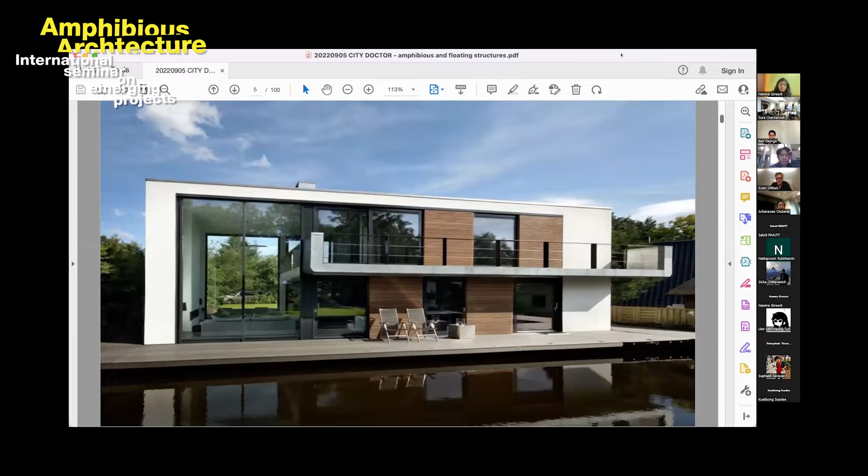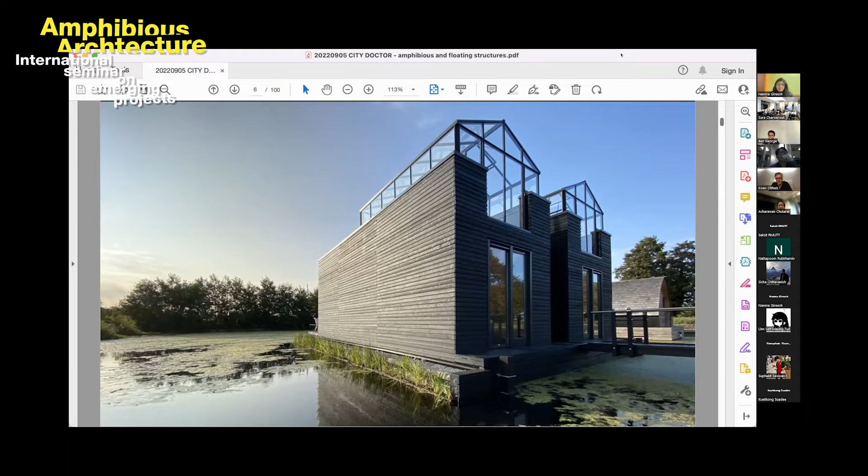Amphibious structures like these ones that seem to be a normal house, but if you walk around, you see they're also floating houses, which will emerge from the water once there is a lot of flooding. Houses that are being built prefab, in small CLT, cross-laminated elements, brought to the site, still look like normal houses, but they move up and down with the water.

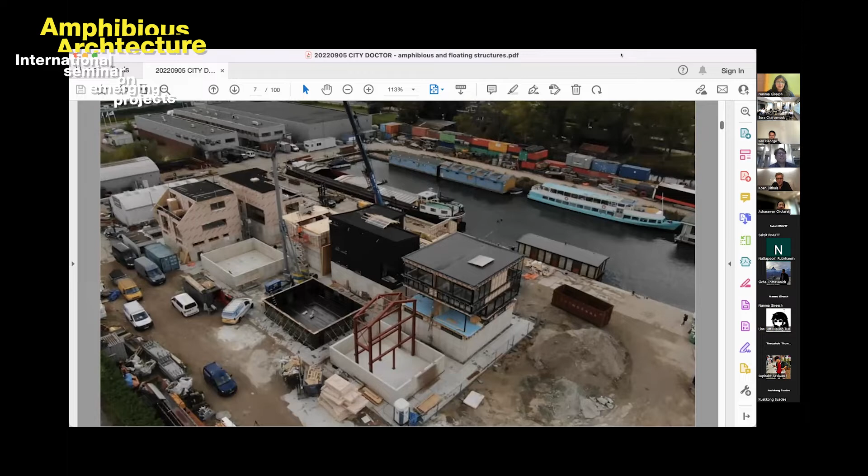If you want to scale up, it's not about one house or two houses, it's really about understanding the logistics of this kind of construction. For a project in Amsterdam, which is called Schoonschip, we had to rethink the construction process. Almost 50 kilometers outside the city, there was built a kind of temporary dry dock, a temporary site where all the concrete foundations were placed. All the houses were built on top of them and then craned into the water. And here you can see the concrete foundation underneath it, placed in the water and then towed to the location.

And at the location, they were all connected, and it ended up as a kind of neighborhood with all experimental housing, disconnected from the grid. They made their own energy and their own sewage system. They share energy. If one house has more energy than another house, they can take it from each other. So it's the next step.

Housing in the Netherlands starts, of course, in canals and small lakes, but has already evolved into living on rivers. One of the projects is in Dordrecht. We just saw an example of that. In that river, you can see the water can even go, in extreme situations, almost 4 meters up and down. For that, there are big stilts next to it. And even if you go on holiday and come back, you will find your house still safe, only maybe a little bit higher than before.

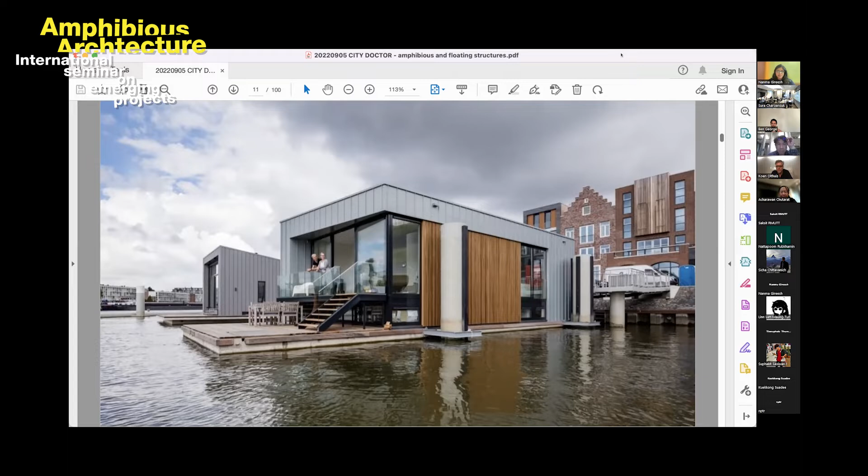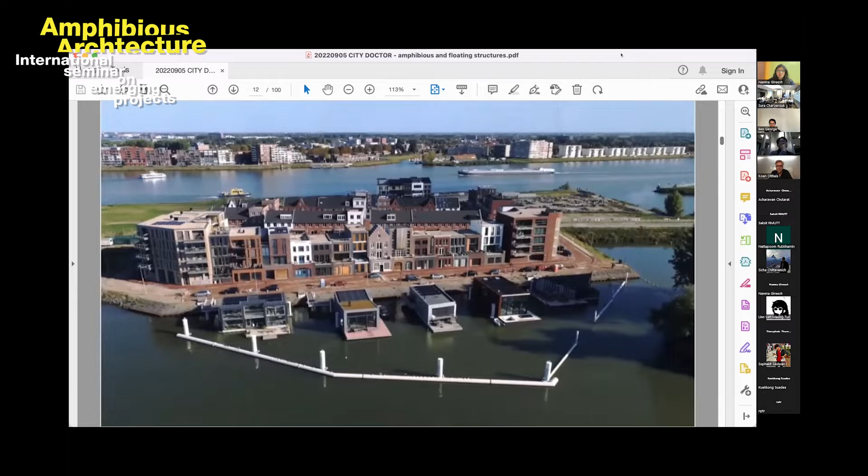Some floating breakwaters around it. It's partly to get the waves a little damped, but in reality, it's more to keep the waste out of your neighborhood, because the houses themselves are stable enough to work with these kinds of wave climates in that river. If you can do these kinds of structures on the river, you can also go to larger platforms built from modules, and then to what we call floating islands.

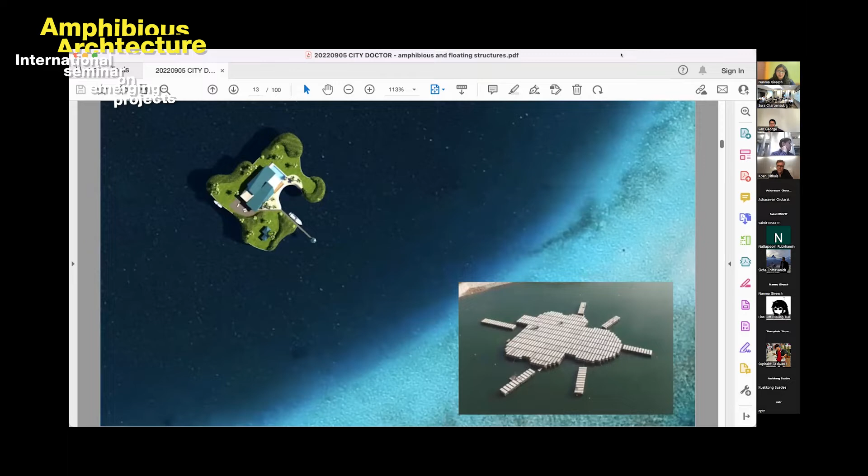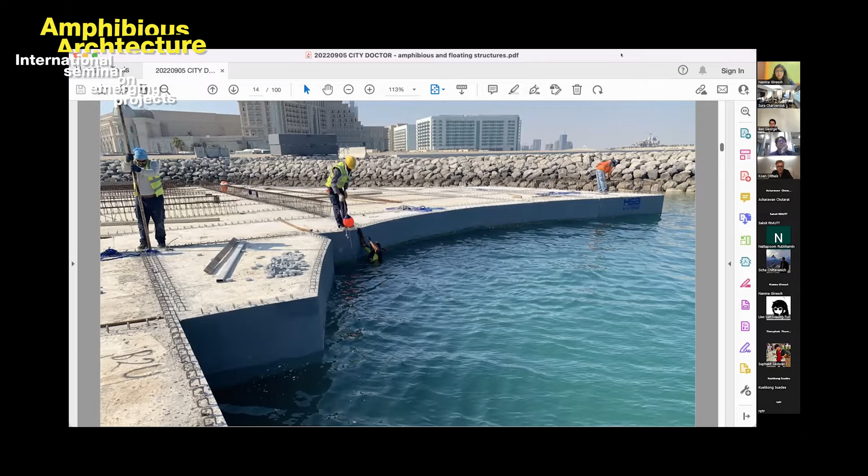We are working now on floating islands in Bahrain. We're doing that with parties in Turkey who build modular structures. Modular structures are connected to each other. So you bring them as Lego parts, you make your complete shape. Then you take another layer of reinforced steel, and then you pour the concrete on top of it, and you can make almost every shape you want. And once you have done that, then you can place the houses and the trees on top of it.

So we're going to build 20 of these islands in Bahrain, and the first test island was just finished. If you can do islands, you can even go one step further, and that's designing building blocks. And a building block is then a platform with several floating houses on top of it, even parking in it.

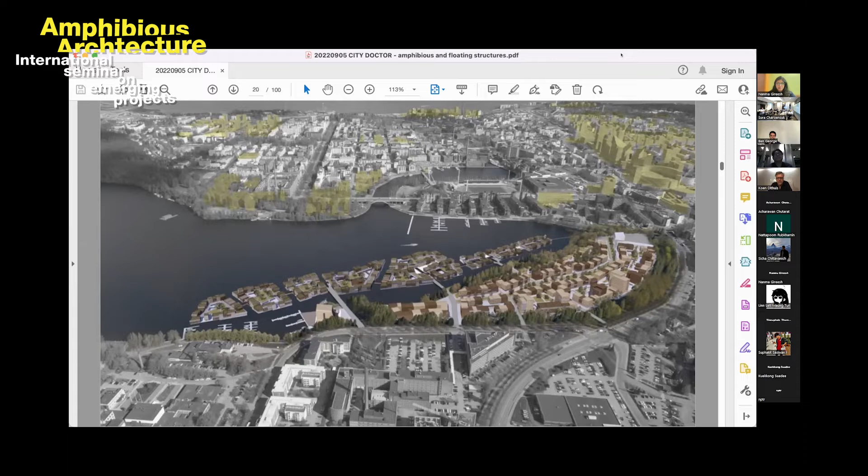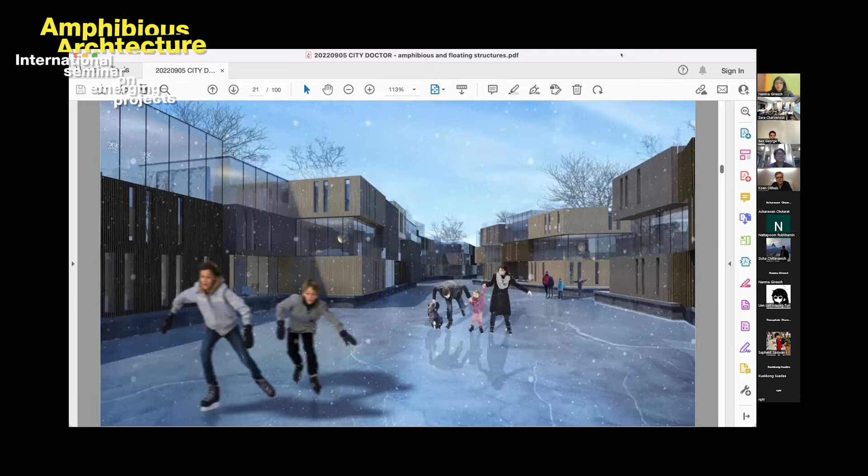And if you place these kind of building blocks next to the shore, you can create complete neighborhoods that are not that different than neighborhoods you can expect in Amsterdam. And so in the wintertime, fantastic, of course, to skate over the water. So all these things are elements, are kind of medicine parts, which we can start to use for cities all over the world to solve their problems.

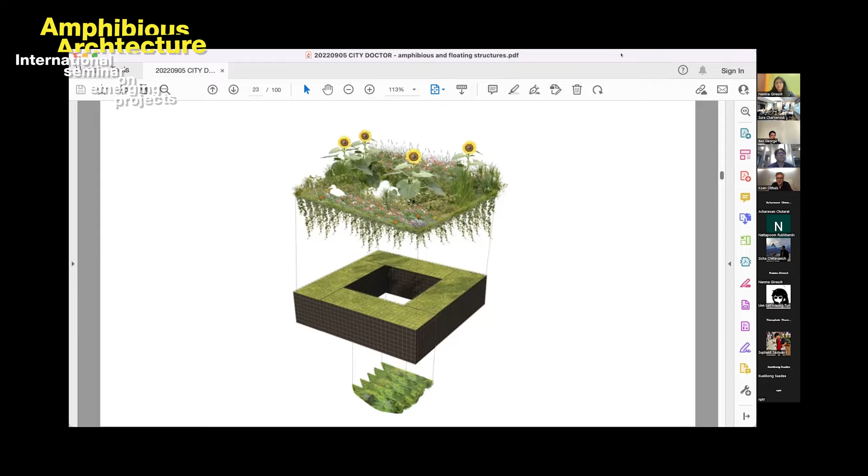The problem is not only housing, but it's also how we can get a better symbiotic relationship with nature. If we do designing on water, mostly they ask us to also take care of the green. For this, we have designed some floating parks that have green above the water and even green underneath the water.

This is a small floating park in the south of the Netherlands, which is existing of all these modules, which are there now for almost a year and a half. And already we see a lot of changes underneath the water for the habitats of the fish. Very, very nice. And with the same structure, we also can grow now to the larger parks.

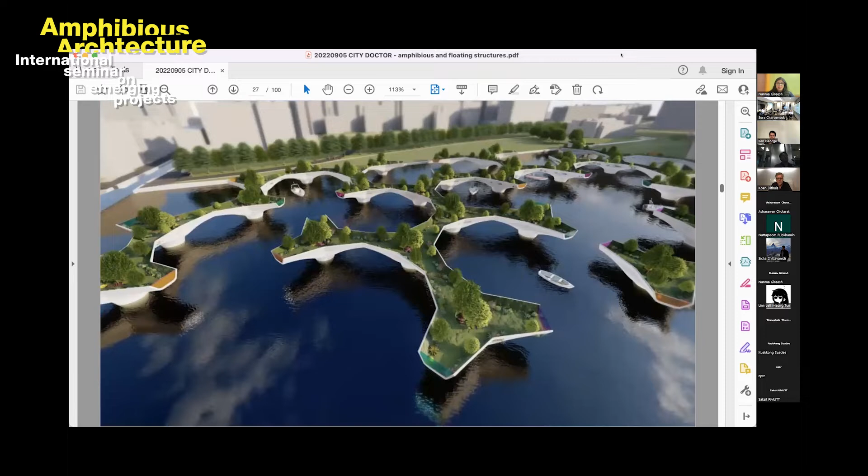We got a first assignment from the aldermen from Amsterdam, where they want to have a kind of modular floating park. And the idea was not to take only water away, but also keep the water, make it possible for people still to go there with boats and add a layer of green on top of it. So it will end up in a kind of park with almost 50 bridges, and you can go with the boat underneath it and still have the green on top of it.

The beauty about floating parks is that they don't have to be static. So we think that one of the medicines and one of the solutions for cities that are changing and you want to adapt is that you also can adapt to seasons. So this is a seasonal park. It's for Toronto, where the park in the summer creates a fantastic open space in the middle where you can go with your boat and you can enjoy the water.

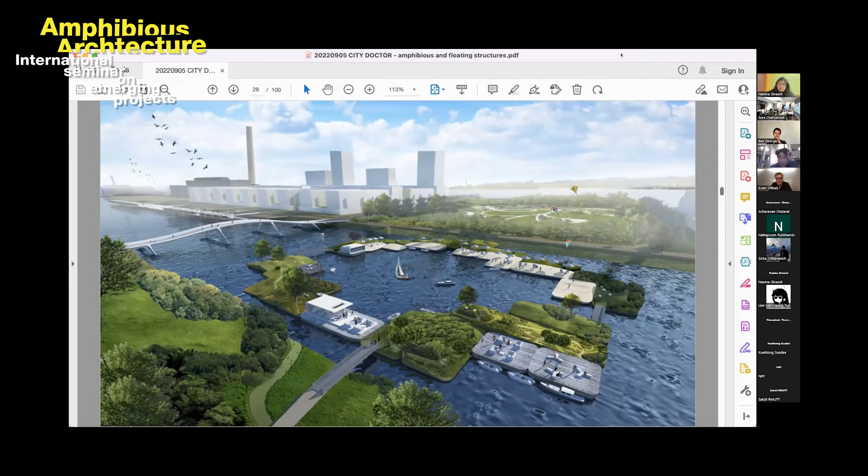But in the wintertime, the whole floating park is reconfigured, and it starts to be a system where we have on two sides a protected water, and where the green takes the wind of that region away. From that project, we even went one step further.

We got a request for a project in Qatar, where the Emir of Qatar was thinking of how he could cool down the temperature in Doha. And for that, he wants to build a floating forest in front of the coast of 10 kilometers by 2 kilometers, really, really large. And by taking more shade on the water, they think they can reduce the temperature of the water with 1 or 2 degrees. And then with some cool wind over it, it must have a little bit of effect in Doha itself.

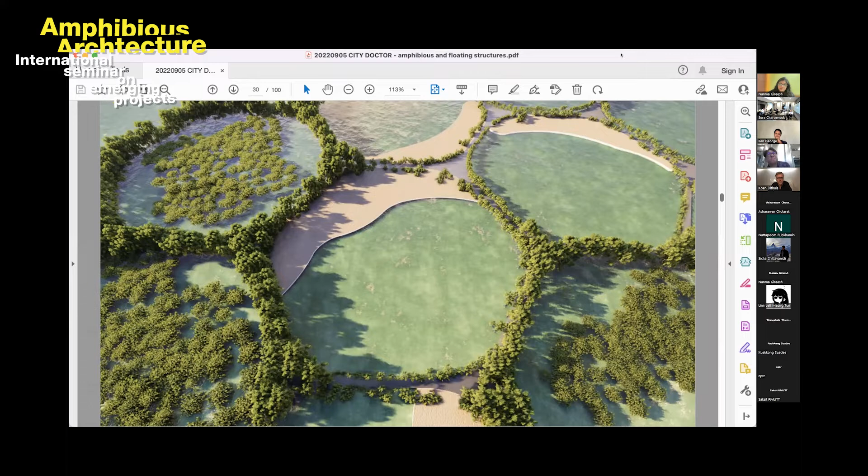Of course, you can't build a complete park from 2 by 10 kilometers. So it should be a kind of grid system where the technology came from the fishing industry, where you have these large fishing farms, these round fishing farms of tubes, and in between we get then the floating mangroves.

That brings us to the next medicine, and that is the adaptability and the possibility to react to changes and to requests in your cities. We call them city apps, which are kind of instant solutions to upgrade the performance of your city. And to do that, you need structures that can be moved from one location to another location. It doesn't have to be fast. And can bring a function and connect that function to your city.

This is a project we've done in Miami, which is a large-scale floating villa, and the villa is both a floating villa, a stilt villa, and a boat, so it can get all these different kinds of legal statuses depending on what you want. Now here it is a floating platform, but if you start to move it, it starts to be a boat because there's an engine in it.

We have the electricity, we make it with the solar roof, and then if there is a big storm situation, we can push up the building out of the water. And by that, the waves don't hit the building anymore, but only the stilts, and you get a lot of stability.

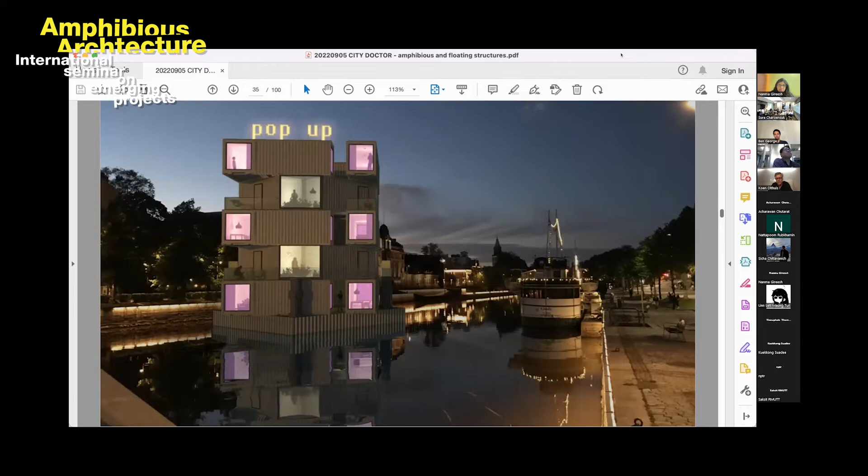Of course, this is fun for one family, but it's not about that one family, it's about the technology that's behind it. But with that technology, it's also possible to go up higher to 3, 4, 5 stories of very simple student housing, also with the same stilt system around it, so we can stabilize it a little bit. And by that, you have an instant solution if there's a request in the city for housing or student housing or for whatever function you need.

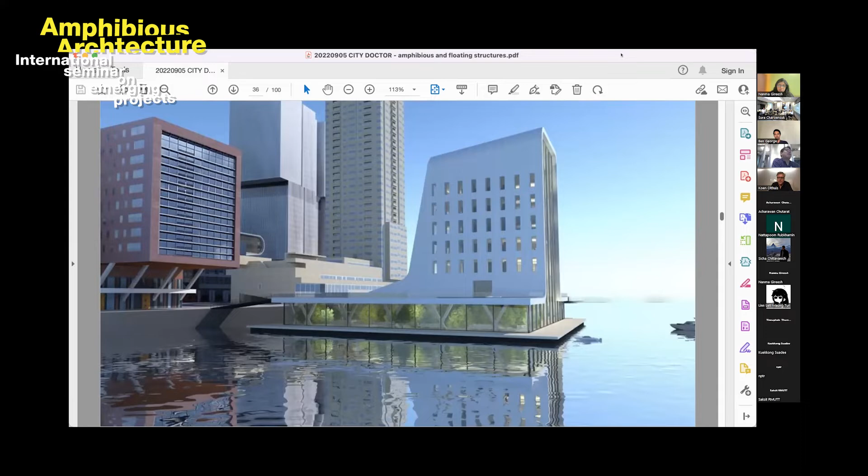So by doing that, you also can grow to these kind of floating offices. So it's the same technology as in that floating house, only now on the large scale. And again, scale is what we need.

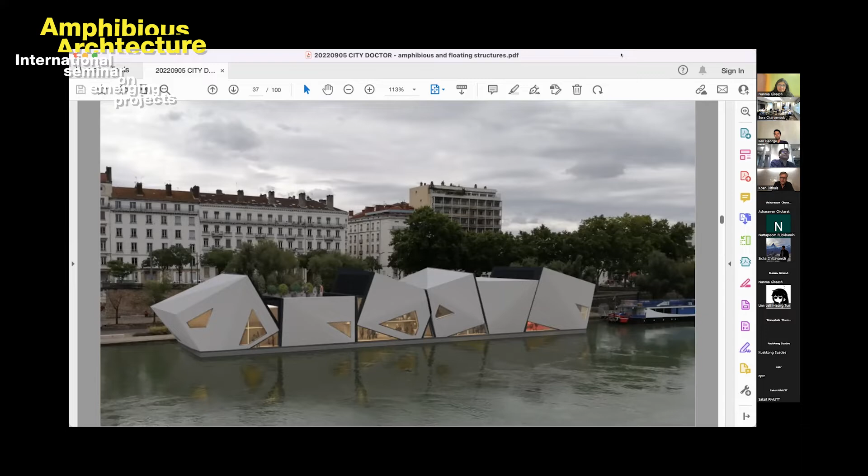Another city app, a function that is brought to a city for a certain amount of time, is the floating theater. We are actually now building in Lyon, in France. And there the city has given the owner of the theater permission to get the theater there for 10 years. But after 10 years, it has to be moved. So they already have now made a deal with several cities in that region, that after 10 years, they get a new location in another city. So it starts to be a function that can be connected from city to city app.

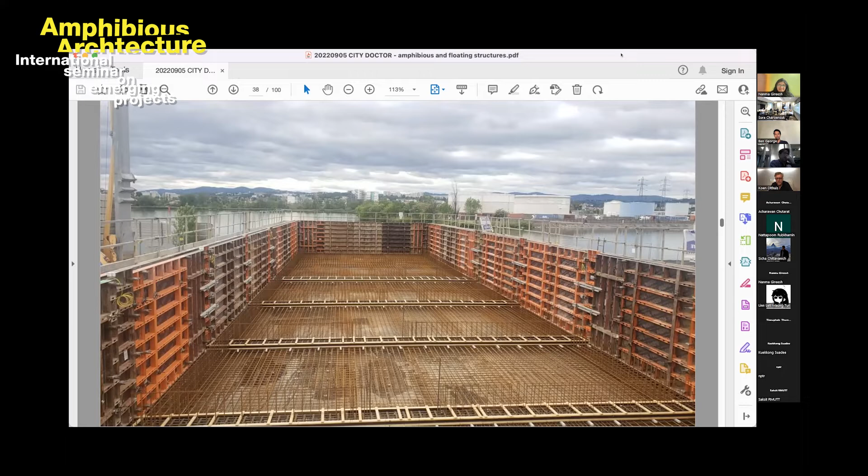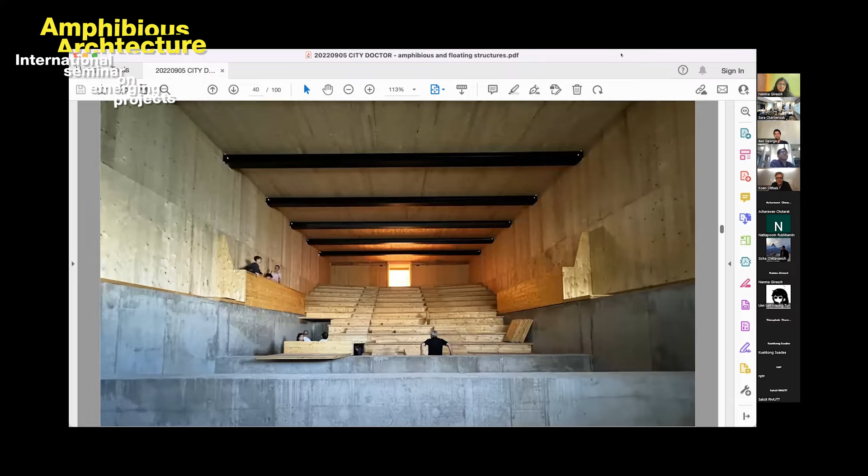Made from a very large concrete foundation. I think the largest built in Europe till now in one piece. And inside we built it with CLT, and here you see part of the big theater stand there. And it will be finished, I think, at the end of October.

So all these kind of elements can bring us slowly to a next step where we can use it to not only do functions, but really build cities or parts of cities, because we think that expansion of cities will be beyond the waterfront.

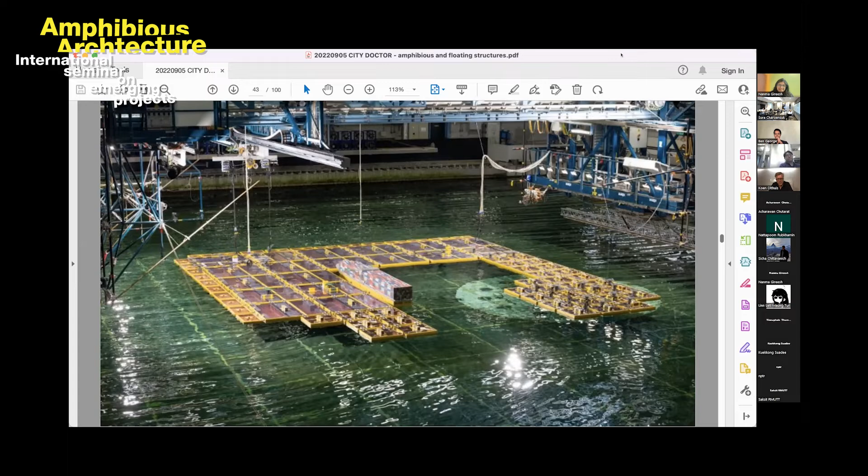In the Netherlands, there's a difference between the architects and the engineers. We have Marin, it's an institute in Wageningen, who does all these kind of studies for large-scale platforms. And there was a study, it's called Space at Sea, for which Dutch engineers and architects worked together to see how you could build on open sea. Because you have probably seen these fantastic, beautiful images of floating resorts in the middle of the ocean. Well, in reality, it's completely different, and sea is very difficult and very harsh, and you have to be very, very careful to start living on the water.

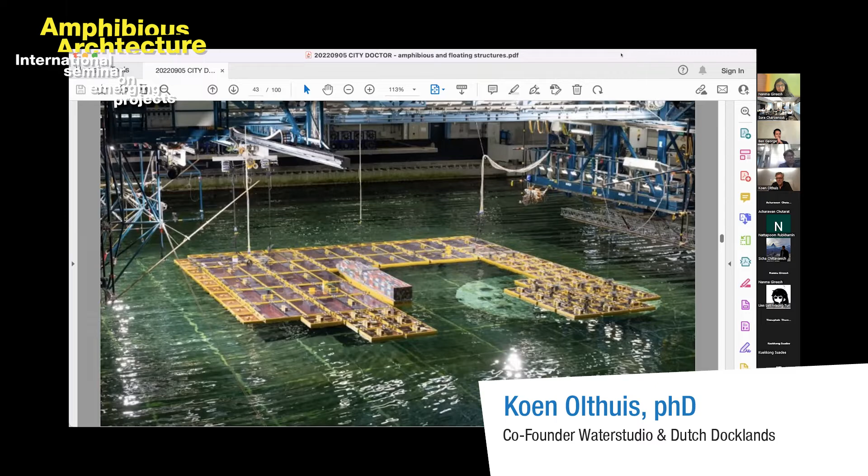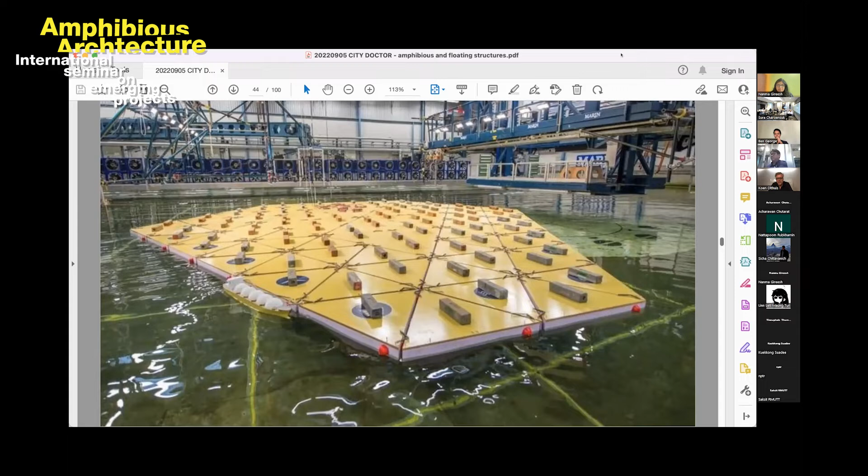So with Marin and with the engineers, there's been a study for large-scale floating platforms that are semi-rigid, so that the platforms can move a little bit, but together they create platforms that are stable enough to house more than 1,000 people. The architecture of these kind of cities on the water will be extreme.

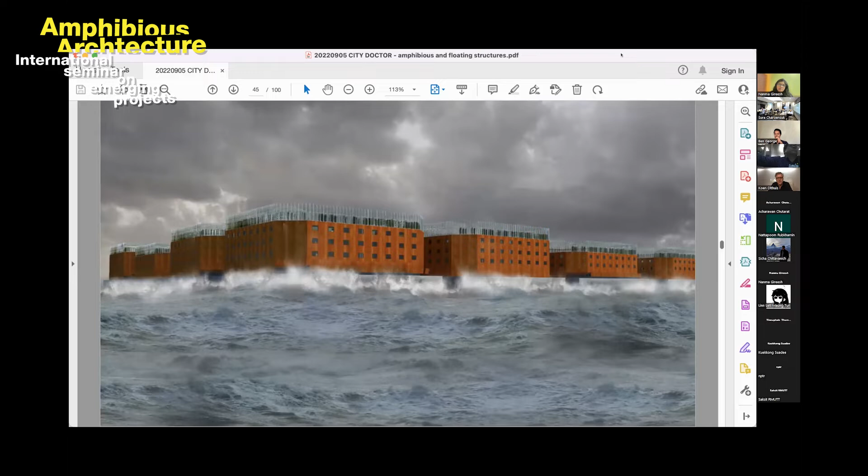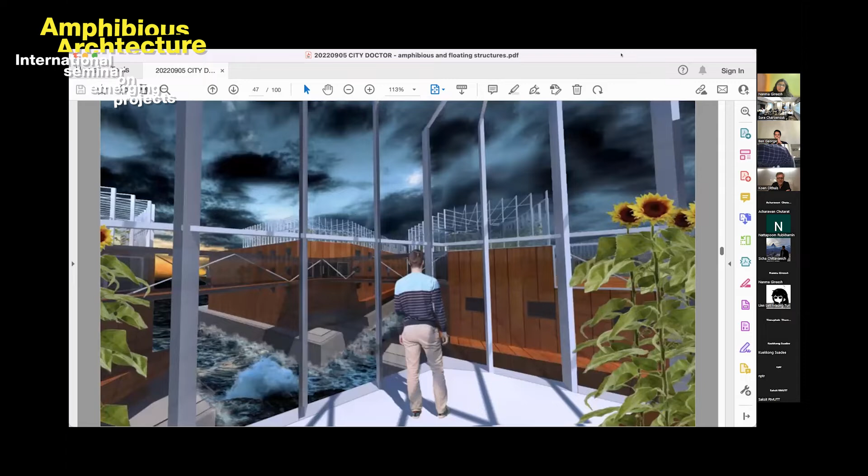So instead of having beautiful houses, we build kind of very large-scale steel fortresses, and then in between the fortresses we have these canals. But if you look then inside the courtyards, it can look quite friendly, because you take the wind and the waves away. But in between is not a place for people to enjoy the canals like in Amsterdam. But it's the reality. It's on open sea. The sea is not your friend, and you have to be very, very careful to take advantage of the sea.

So for us, one of the first projects we have built on water is what we call the SeaPod. Most probably you have heard about it. There was a floating spar that was built just outside of Phuket in international waters. It was a floating spar, so it's like a big stilt, like a dobber if you go fishing. And so it can move up and down. It's completely not connected to the sea bottom.

And there were 2 people who started to live in there, and they said, well, it's international water, so we think we are allowed to live here. The Thai Navy thought a little bit different, so they were forced to go away, and they left the building, and they went to Panama. And they came to us at Waterstudio and asked us if we could redesign the structure, because it looked so unfriendly. So we designed what we call the SeaPod.

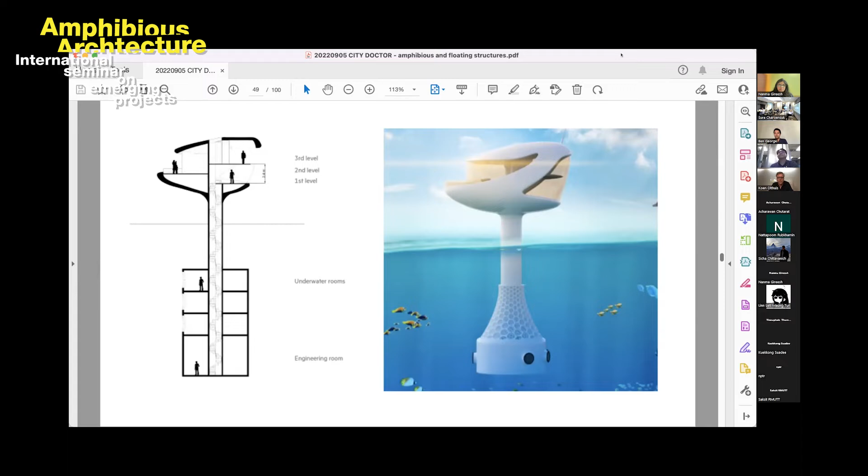And the SeaPod is the second version of the structure that was built in Thailand. And it's a double-story building with only, I think, 80 square meters inside, but we also have space underneath the water with an underwater room. And it's now under construction.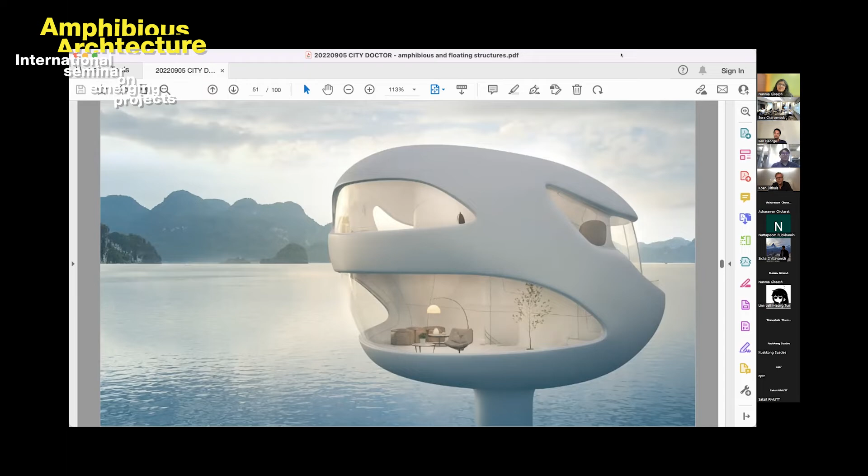It will be opened on the 21st of September, so in 2.5 weeks. And it's in Panama. And what we did, we made the shape now a little bit more friendly, a little bit more futuristic, because again, when you asked your question, why aren't projects being scaled up? It's not only about technology, it's not only about rules and regulations, it's also about getting the people to love these kind of buildings and to understand how they could work in their environment.

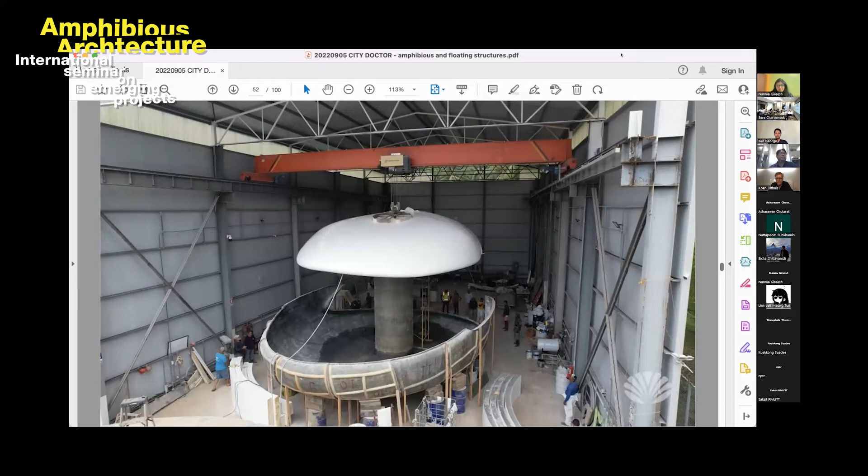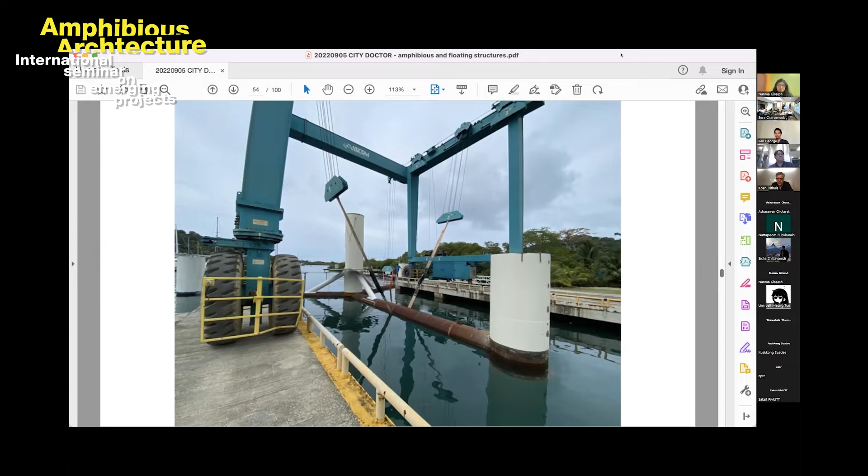Here we can see the structure being built with the molds in Panama. Here's some inside views of that similar building. Here we made a foundation which could be used for more shallow waters. So if you have waters up to 40-50 meters, we can have the complete spar. But if we have waters up to 10-12 meters, we go for this kind of tripod of a floating structure underneath it. And here you can see it in the harbor in Panama, just before the superstructure.

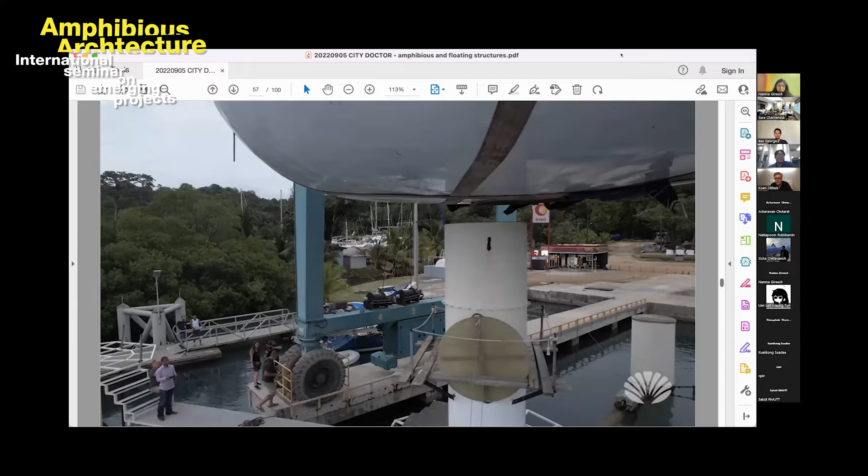So the seapod itself is being placed on top of it. Here we're testing the stability of it. And here you see the first structure being put just on top of that foundation. So in a few months' time, they want to do, I think, 50 of these kind of seapods a year. And so this is the first scale up.

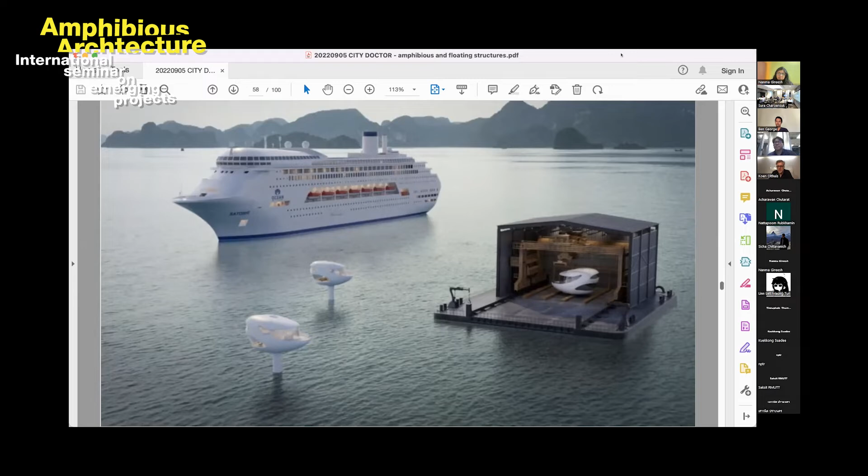And what the guys of Ocean Builders, who is the client, did well, is they already thought about the whole engineering process. So not only about the architecture of the first of it, but how can you build them economically? How can you make sure that it's within the rules and regulations? How can we sell them? How can we maintain them? So all these things are being added.

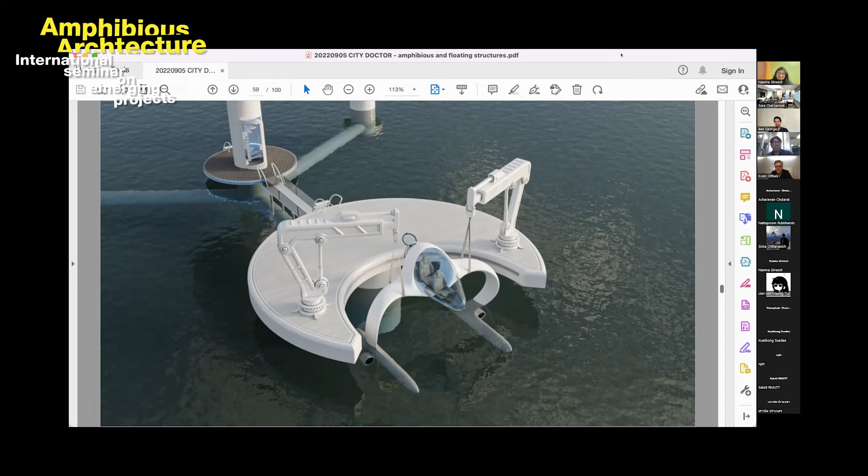And of course, if you build these kind of floating structures on open water, it's not only about the house itself, but also how you can go from one to another. And as these guys are from the Bitcoin industry and they have money enough, they can also test these fantastic other kinds of movements. So for them, in that same system, we've designed what they call Jetsonville. So in Panama, there will be a first neighborhood with around 220 of these kind of seapods with some floating harbors in it. And you see it's all connected and built around existing islands in the south of Panama.

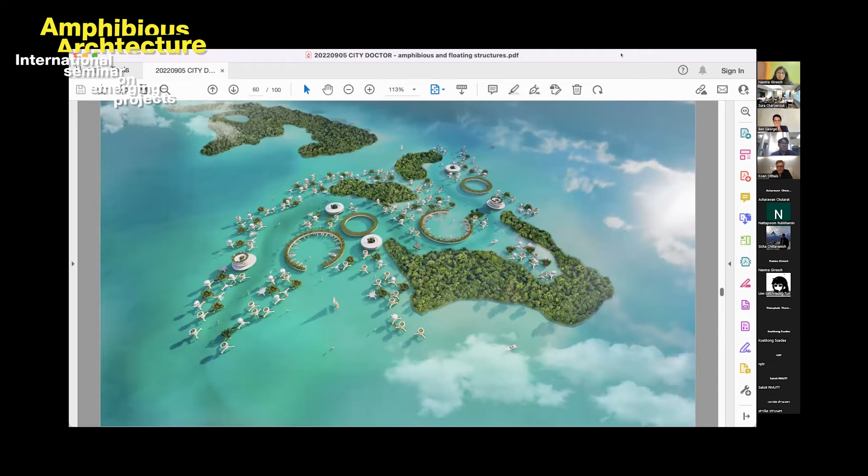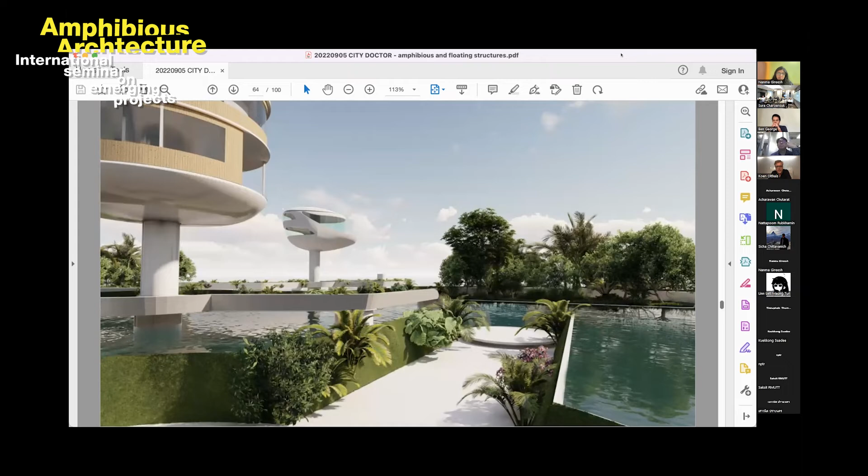And what we try to do there is to rethink how a floating city or floating neighborhood could work. So all these kind of elements can move by themselves, or they can be moved and towed. And it can be a city that looks different in the next few decades. It can grow, it can shrink, and it can reconfigure. Here you can see some of the elements connected to each other. Also, there's of course a lot of floating green, which is important. And this will be the first part of the neighborhood, which they want to have ready in, I think, July next year. So then you have the first 6 to 8 seapods ready.

With these kind of structures, we go to the next project. And of course, one of our most important projects is in the Maldives. The Maldives is for us a fantastic place where for the first time after almost 15 years that we work on these kind of floating structures, we really could do a large-scale project. Maldives is a country that consists of 1,100 small islands spread out over 700 kilometers underneath Sri Lanka. And almost half of the people are living in the main capital, which is Malé, one of the most densely populated places in the world, which is 2 by 1 kilometers. And as you can see, it's built in a lagoon, so that's in a quite shallow area. And outside there's very deep water, so there's also no possibility for the island to grow.

Overcrowding is a problem where maybe 50 years ago people were still walking there on bare feet on beautiful sandy roads and only bikes were there. Today life is really difficult over there. You're living with 2-3 generations in very small apartment buildings. So there are a lot of social problems they are facing. And what the government has seen is that the only way to solve this is to add housing to the community. But where do you find space? Well, they have an island close to Malé. It's called Hulhumalé. There's also the airport island, where they started to make some reclamation. This was just the first days after the 2004 tsunami, where you already see that a lot of sand, because of the waves, has been all washed away into the ocean.

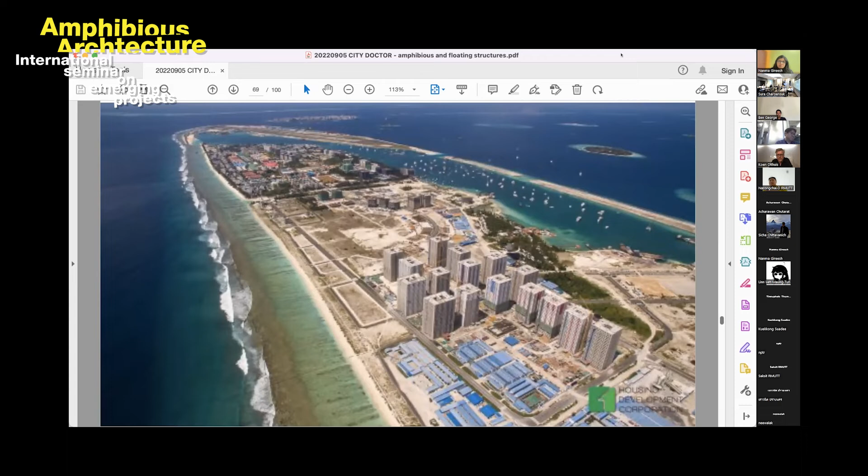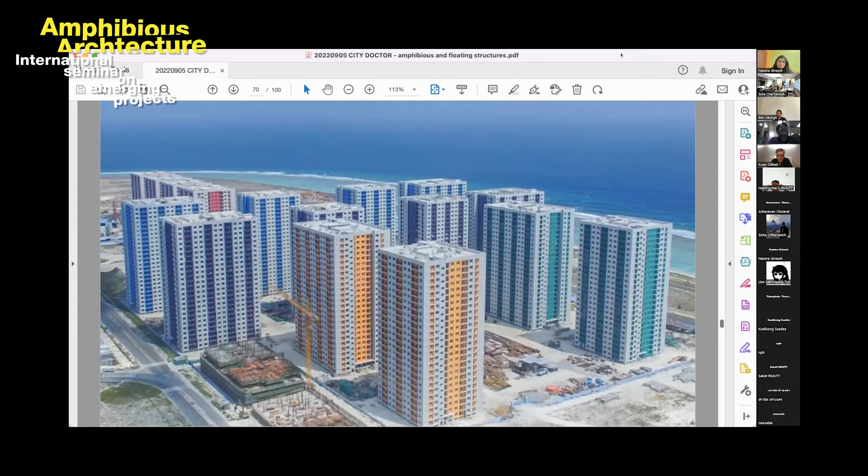That same island you just saw, they needed housing, so you need space, you need density. So what they did, they built these kind of towers, and each of the towers exists of, I think, 400 apartments. Each apartment is around 50 square meters, and it will cost you $130,000. And it was sold out within, I think, 2 months. And then they start to build, and the Chinese have built it for the Maldivians at the location. But what you get is, it is not their kind of culture, not the way how they used to live on the islands.

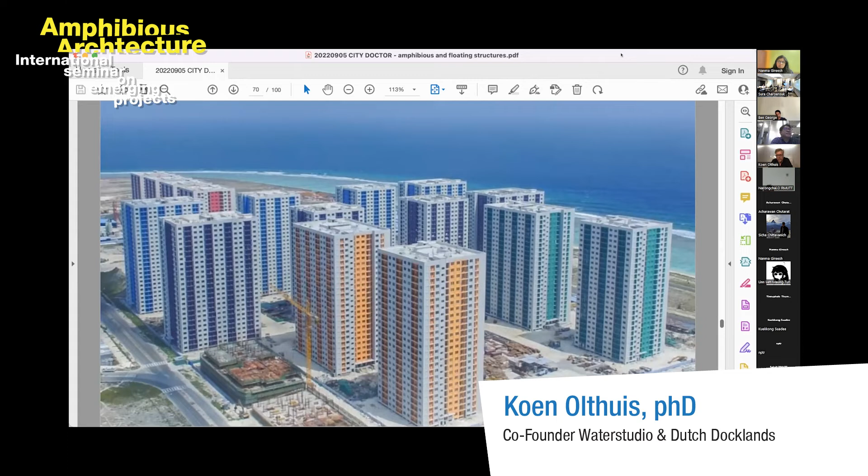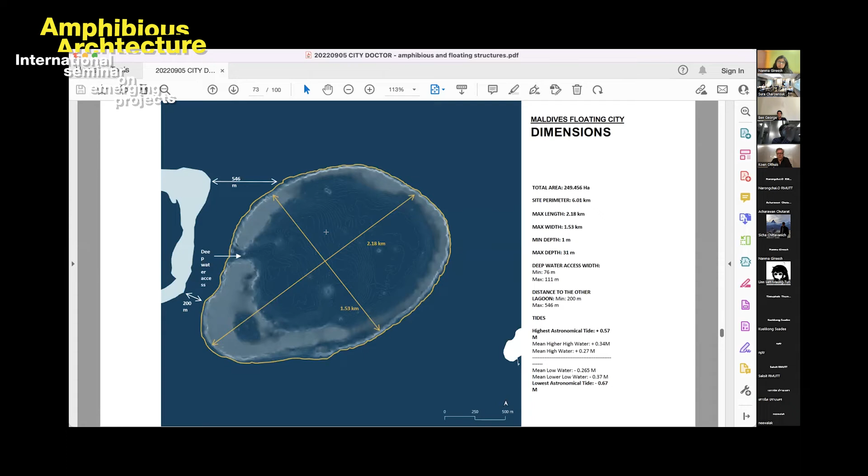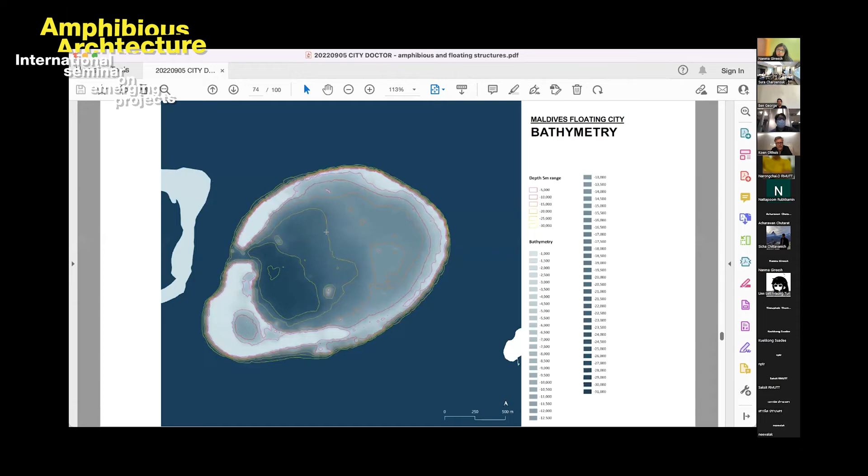The floating city location is, again, same size as Male, 2 by 1 kilometers. So it's quite large, and it has some natural reefs around it, so it's protected a bit from the waves. There's less wave activity than in the water around it. The bathymetry shows that the edges are up to 3-4 meters, so we can add a little bit of sand there, creating even more protection. And then for the inside, we had to find a way how we could place there more than 5,000 houses with the right balance between open water and these built structures.

And we came up with an idea that comes from nature. This is brain coral, and what I like about brain coral, if you see well, is that the brain coral finds a fantastic balance between open space and the coral itself, to allow the fresh water to penetrate and grow through the coral. So we took that as an inspiration.

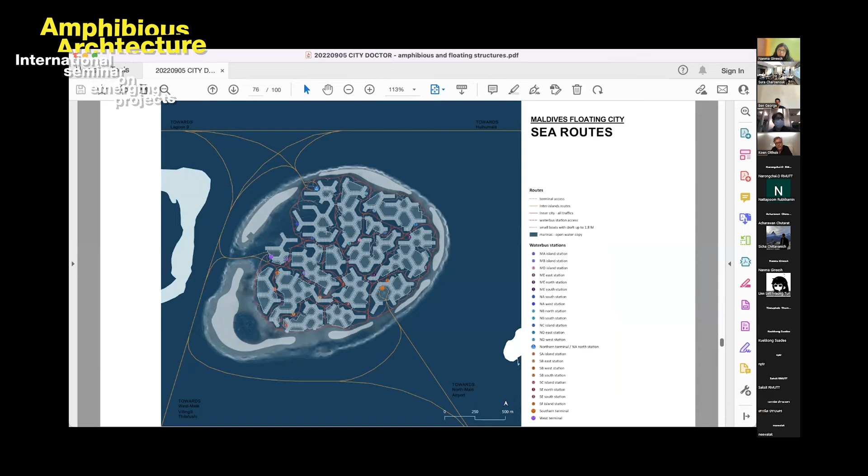And second, we also wanted to have a kind of hint towards the architecture of the locals, also from 50 to 100 years ago. For me as an architect, it's quite difficult because now we are contemporary architects. You always want to make crazy buildings, but here it was not about the architecture. It was really about how can you do a building that is financially feasible, technically feasible? How can we build it within 5 years? And 5,000 houses in 5 years is quite difficult. It's a lot. So all these elements came together in one project, and we try to bring this kind of architecture there that is very, very specific for the Maldivians.

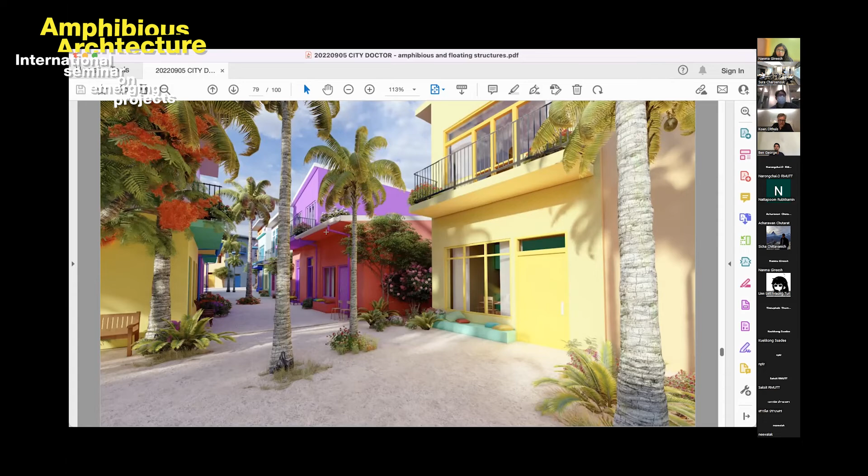So these are all prefab housing. It's only, I think, 5 types of houses we have, 2 and 1 story, and with a little bit of color and changes of terraces and balconies, we can create a structure of 17 kilometers of roads with the trees on top of it, and these different houses and places in between where the children can play. But if you then would zoom out, you will see that around that there is the water. So I think 50% of that whole area is open water, where you can also go with a boat and be connected to move back to the capital city.

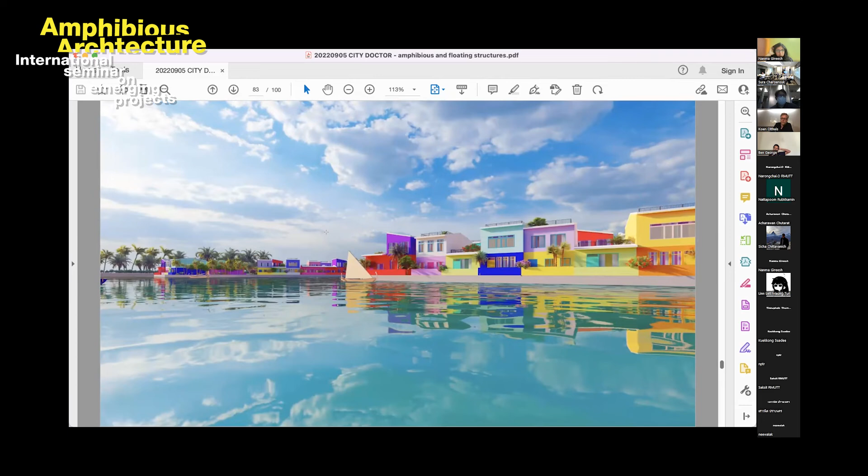For the density, on some places of the structures we also go to 4 stories, because all the platforms are connected to each other. There is an enormous rigidity and stability. And these structures you see here have the exact same apartment floor plans as you saw in the larger towers in Hulhumalé.

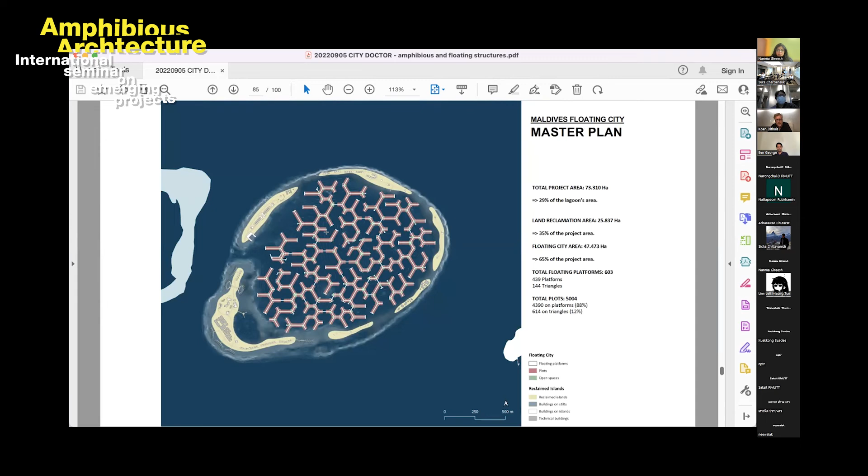So we're showing that for the same amount of money you pay in the airport island, in the ugly towers from the Chinese, you also can do this on these structures here on open water in the colorful place of Maldive City. Here you see the master plan a little bit more in detail. So as you see, there are almost 17 neighborhoods which are all connected with bridges.

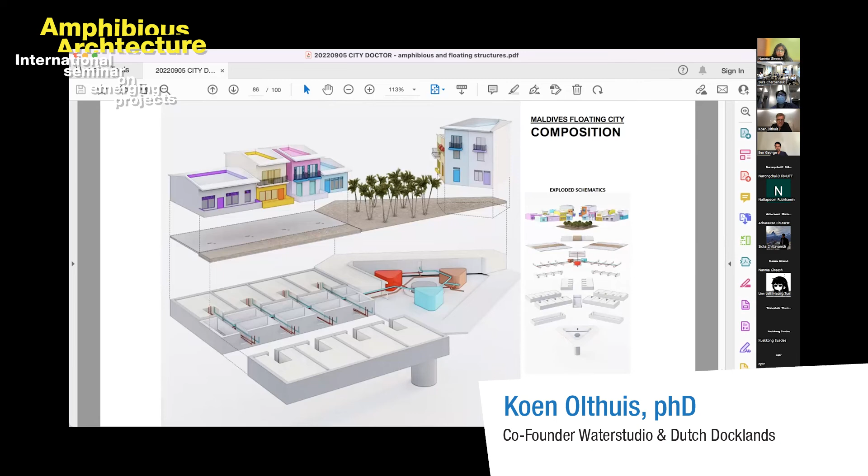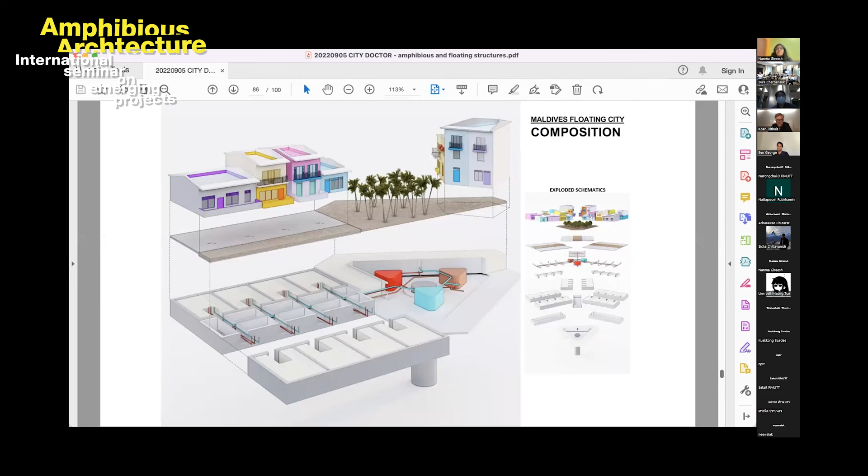And if you zoom in, you see that it's built up of a center pile. Around the pile is a kind of triangle floating platform with sewage storage and utilities in it. And as a kind of blood veins, that's all spread out over the floating roads. So if you would take away the sand, you will open a kind of cellar, and in the cellar you will see all the connections of the tubes. So it's a very simple and efficient way of building a city.

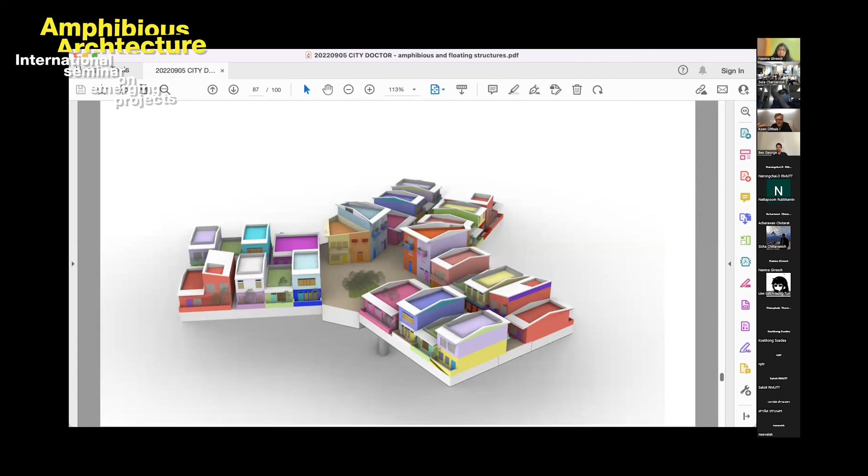Then on top of that, of course, the floating houses. Because space is scarce in these kinds of locations, it's the roof terraces that are the most important, which give the people the fun and the open air and the look and feel. And if you take that as a kind of building block, then all the building blocks together create this city.

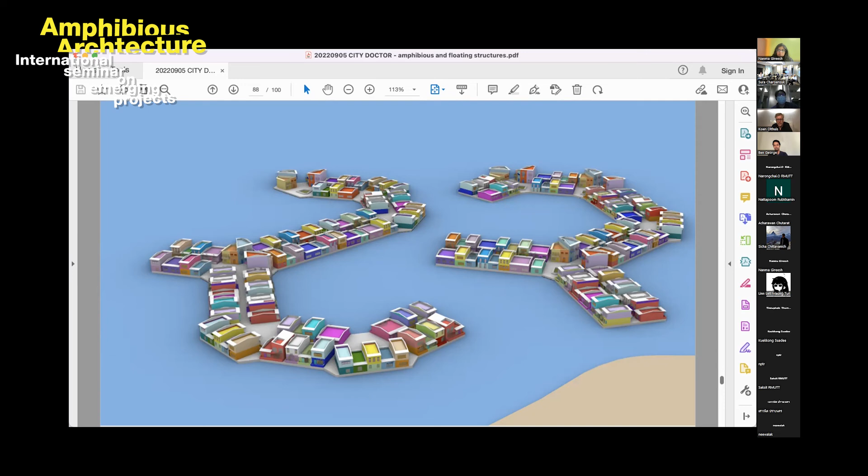In the first year, they want to build 800 of these houses, then the year after 1,000, then 1,200, and then going up. I think 1,600, ending up in a 4.5 year time period where they built 5,004 floating units and plots. The first platform is now finished. That's a test platform with 4 houses on top of it. You see here also the roof terraces with the solar panels. It's been moved to location in the Maldives in the next, I think, 2 or 3 weeks.

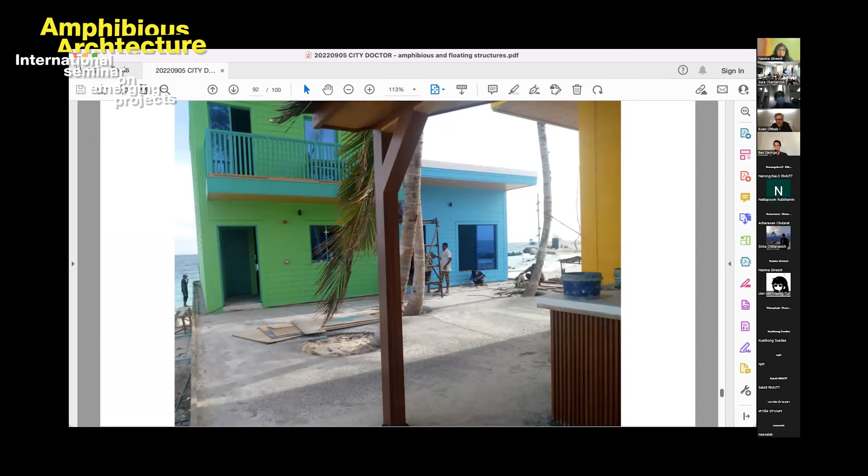And what it shows is that this simple architecture can work beautifully. You see a very small part of the road with a few of the palm trees in it. We went to pick out the palm trees ourselves. I love the ones that are a little bit not straight. It gives a bit of a nice feeling. And so this will be the look and feel of the housing for the Maldivians in the next 3-4 years.

This brings us to the next step. What will you do and learn from the Maldives? Well, the Maldives is of course a typical kind of architecture, a typical kind of location, and we think that the real challenge is for waterfront cities around the world, and definitely Bangkok is one of the areas where this kind of thing can happen. Of course, you can look inside the country, but if you now only look to the outside, we think that these floating cities will not be extreme in architecture or in pattern or fabric. They will just be extreme in how they will be built and how fast they can emerge.

And we think that these cities will start to use water for expansion, and slowly grow into neighborhoods where water is used as transportation, but still you have your normal roads and your normal houses. So people shouldn't feel that different living in a floating or amphibious city than they would in a normal city. And in the end, it will end up in large-scale developments where people live in a kind of symbiotic relationship with the water.

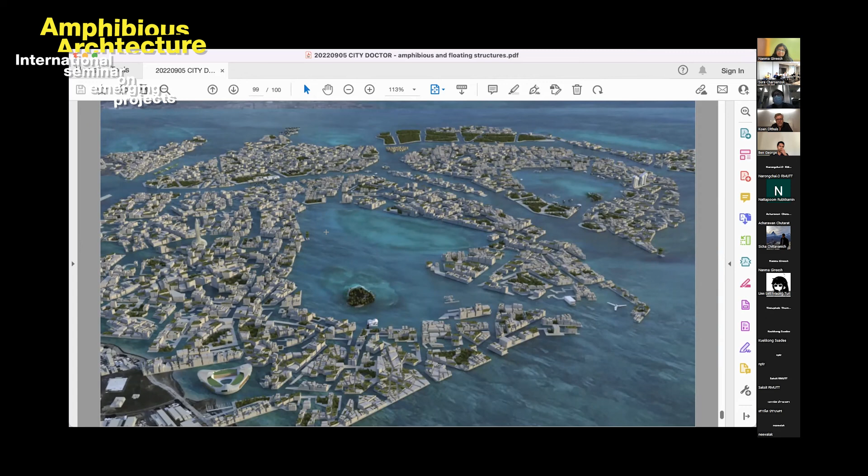And I see it as quite a normal step, not different than maybe 100 or 150 years ago, when people took advantage of high-rise building by creating vertical cities. The elevator was, of course, a very important technology. Now we have a floating technology, and as we also get a grip on our legal framework, our logistics and how to build it fast and cheap, we can create these kinds of futures with the technology.